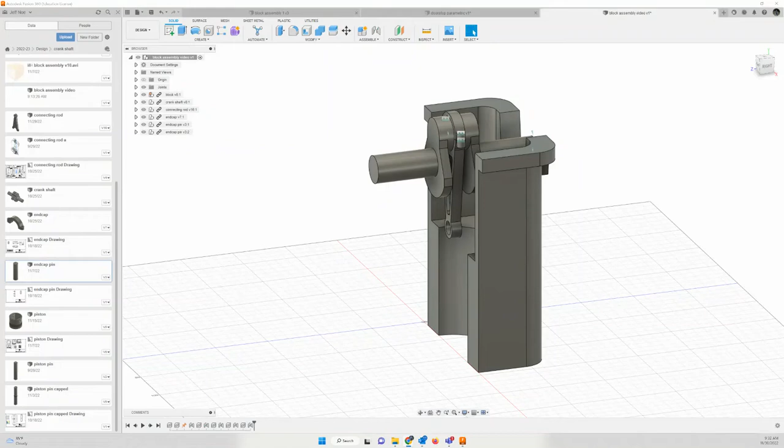All right, so far we've got the block in place. We've put the crankshaft in place. One thing to note on the crankshaft, notice how it's flush with my overhang. Once again, our measurements are very precise, so our assembly has to be precise.

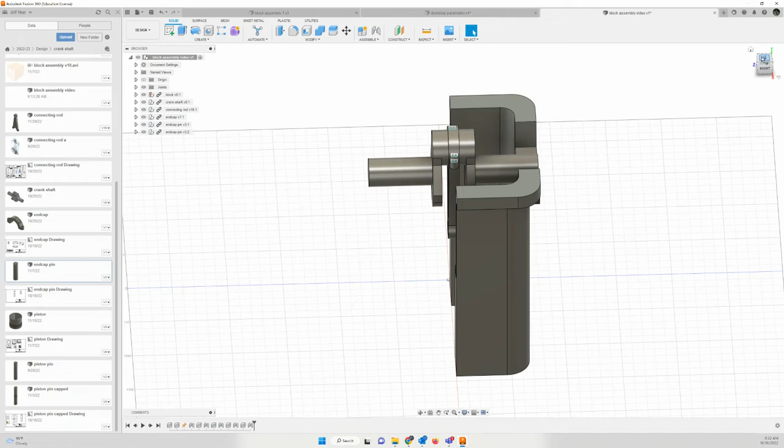The connecting rod's in place. It fits perfectly within the groove here on the crankshaft. If you look at it from the top, it's centered there on the axis. See how the axis runs right up through the middle?

Let's look at the motion. Let's expand the joints and animate the model. All right, so that's what we expect at this point. We've got one revolute, there's nothing there. We're not animating that particular joint where the connecting rod and the crankshaft are coming together, so it's moving around with the crankshaft at this point, the connecting rod is. We'll fix that as we go forward.

We're going to add the piston pin next, and that's going to have a revolute joint. We're going to center the piston pin with the center of this opening, that cylinder there, open cylinder. Then we'll bring in the piston, and it will have a fixed, rigid joint with the piston pin. We'll see what the motion is there, because we're going to come back and add another motion that will create a constraint and force the movement we're looking for.

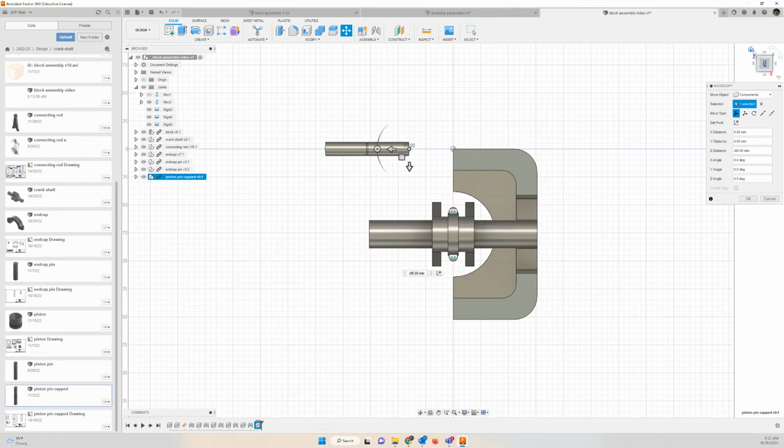Check your caps. Notice how my rounded edges are going to be flush with the rounded edges of the block, those arced edges. That looks good. I'm going to click OK. Zoom in.

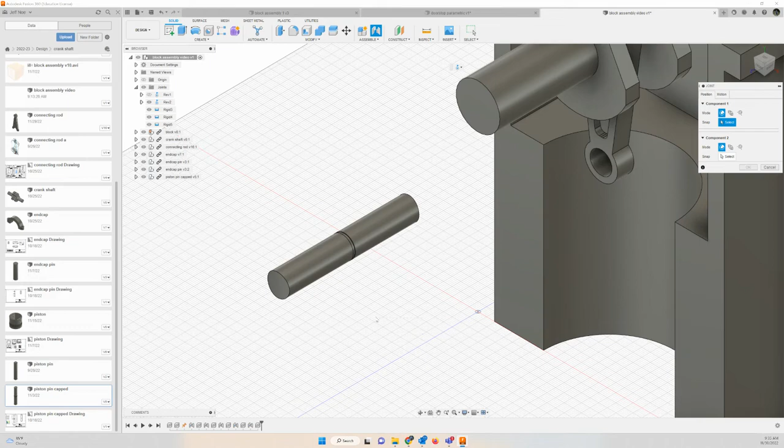Let's create our joint. It's going to be a revolute so that this can spin around the pin, the open cylinder here. And position that snap point. So I've got that cutout as a visual thing, but it actually makes this process harder. I'll zoom in real tight. I don't want the edges, I want that whole band, that body there.

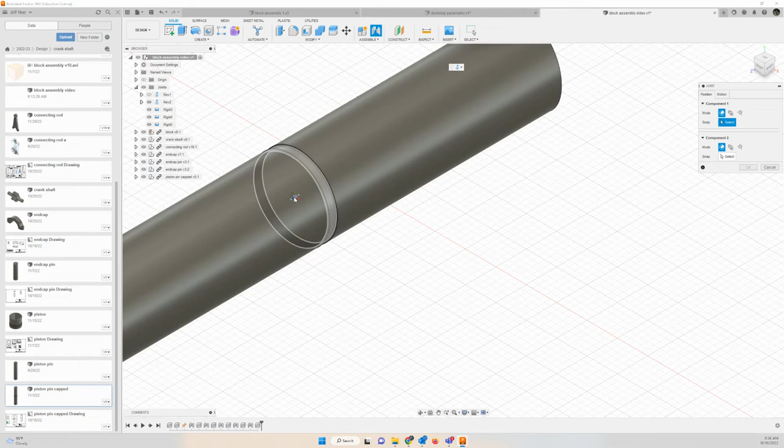Now notice, I've got 3 control points inside of that band that are centered. I want the middle one. So if I hold the control key and move, there's the end, the middle, the other end. I want the middle one. Okay, click. That is the center of my design on that pin, because that center has to match up perfectly to the center of this cylinder.

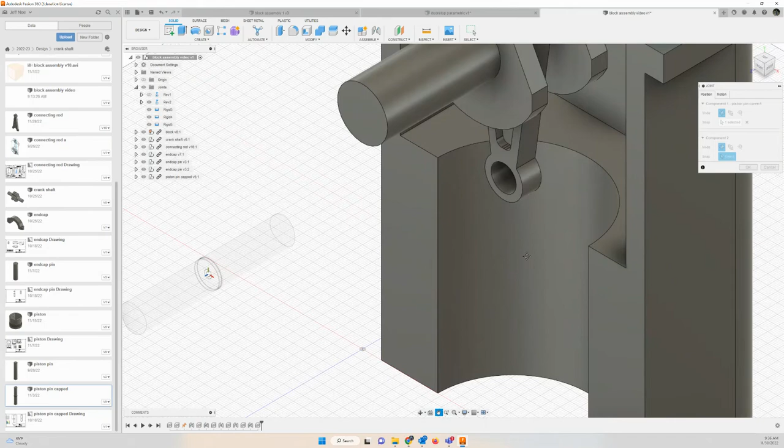Let's move it over. Grab it, there we are. There's the cylinder. Notice I also have 3 points there. So let's hold the control key. There's the middle one, the other end. I want the middle one. I'm holding the control, click.

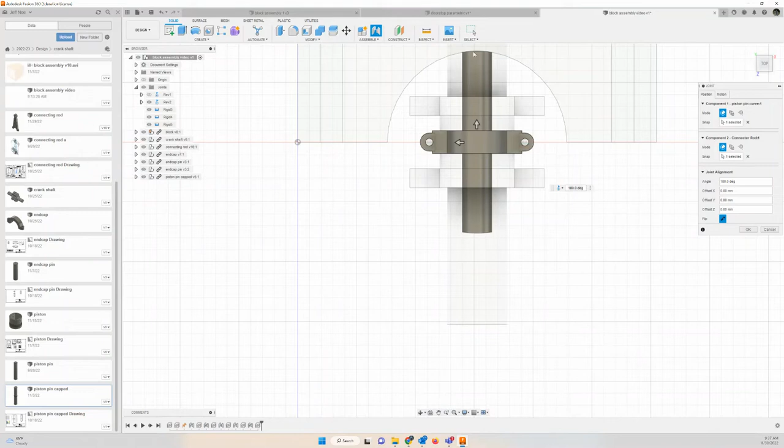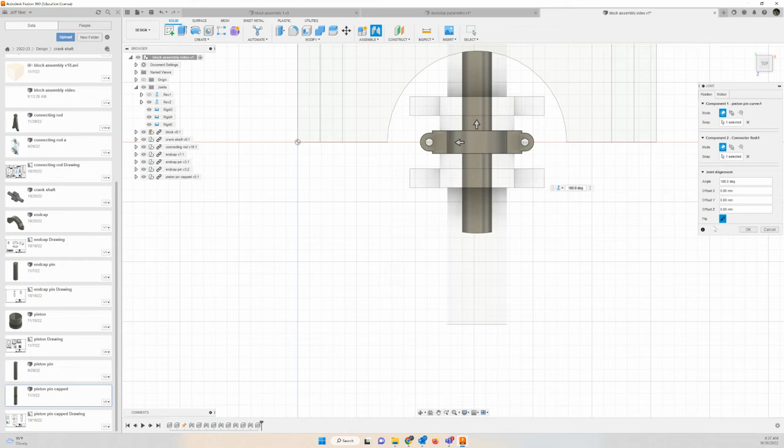All right, now let's go to the top view. Notice how the end of my piston pin is curved and matching the block curve exactly. If yours is not, you may need to rotate it around so that it is, or find the positioning if your measurements are off. I'm going to click OK. Home position.

There I am. Now, we're going to bring the piston in. Our motion hasn't changed - if I animate the model, the whole thing's turning.

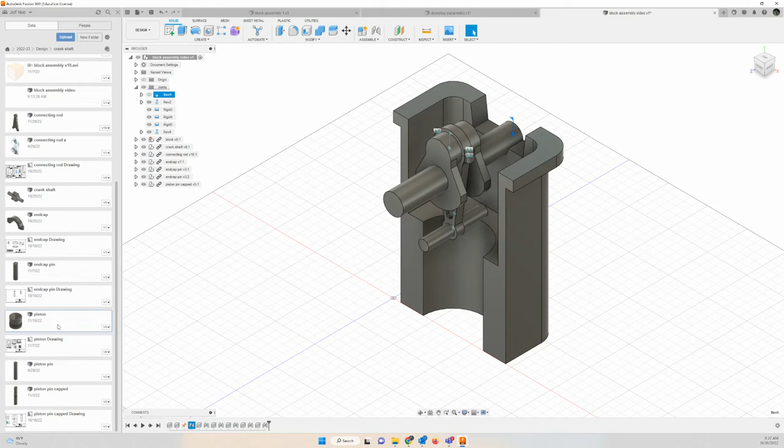Let's bring in the piston. Insert into current design, there's the piston. All right, so my holes are here, and the ends of the pin, those need to line up. Just to make it easier from a visual standpoint, I'm going to rotate it around 90 degrees, and I'm going to pull it out. All right, let's click OK.

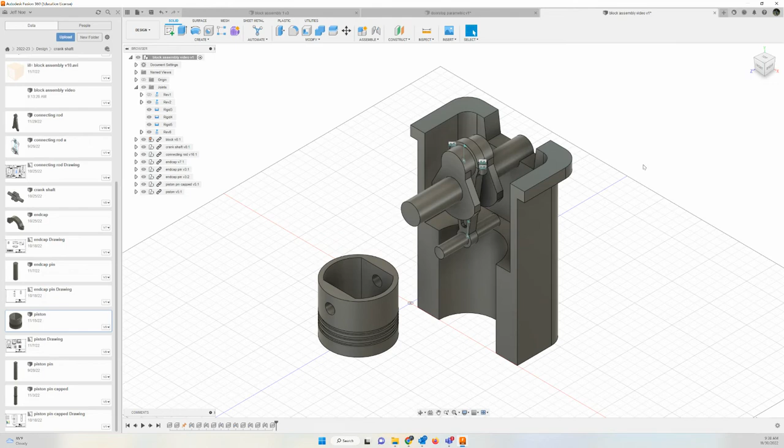We're going to create a rigid joint because this pin doesn't need to rotate within that piston. Joint, let's change our motion to rigid. The piston will be component 1. I want this outside edge.

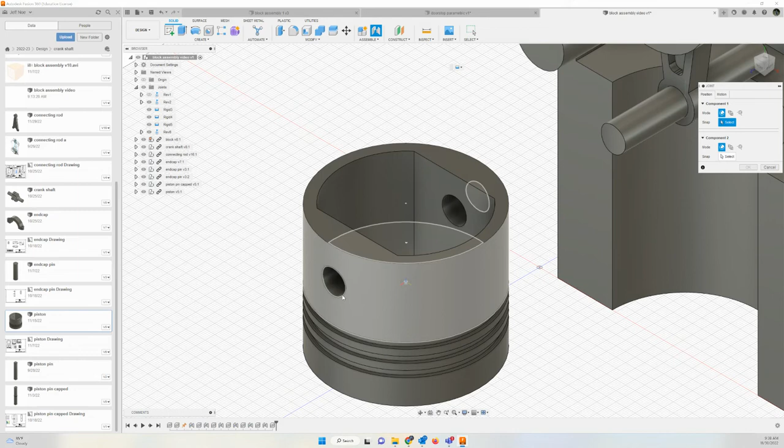All right, so there's the cylinder. Because this is a round face, not a square or flat face, I'm going to have to choose the cylinder, control - I want the outer edge, click, there's that. I'm going to have the same problem with the piston pin. So control key, there's the outer edge, click OK.

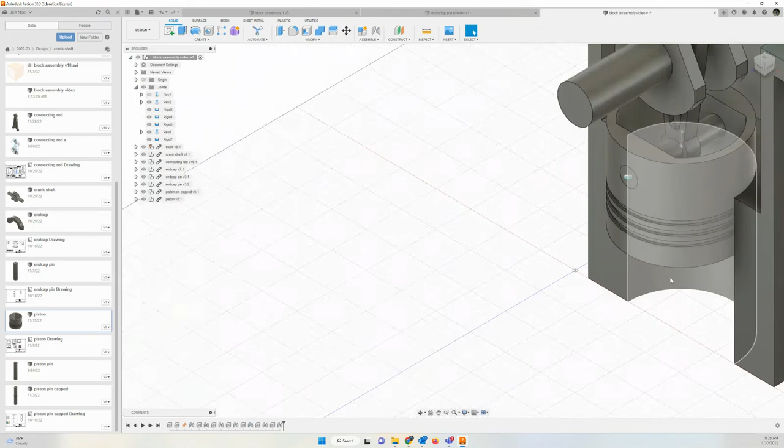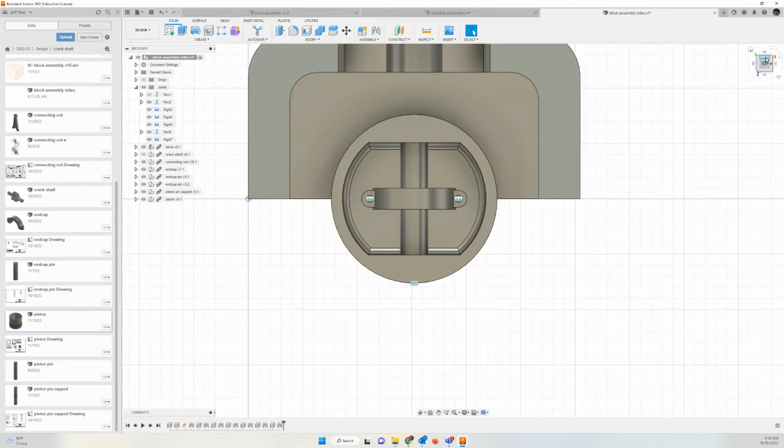Home position. All right, so everything's in place. If we look at it from the top view, let's hide that crankshaft. Look there, that piston is fitting very nicely into the block. All right, let's go look at it from the front. Notice I don't have any overhang on my edges - it's flush, fits perfectly in there. All right, back to home.

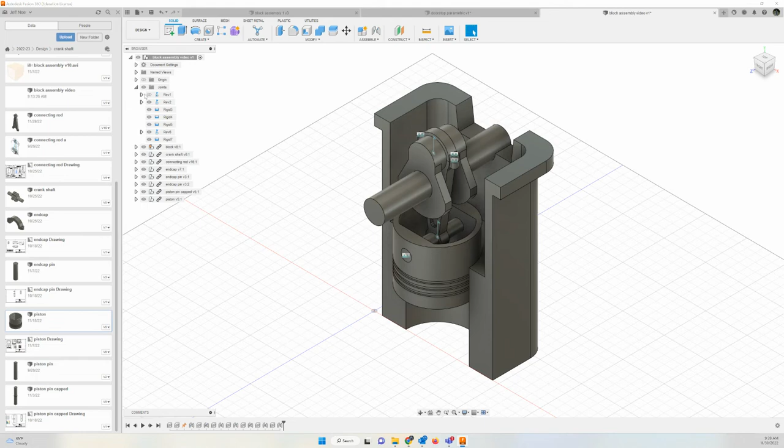Bring our crankshaft back. Let's animate and see what we've got. That's not the motion we're looking for, is it? Not at all.

All right, we need another joint. We need a joint between the piston and the engine block. It's going to be a slide joint because we want this piston to slide up and down within the block. That is going to act like a constraint that allows the connecting rod to rotate around this part of the crankshaft and for the piston pin to rotate within the other end of the connecting rod.

To do this, let's make it easy. Let's hide the crankshaft. I'm going to hide the piston pin. I'm going to hide everything other than the block and the piston, basically.

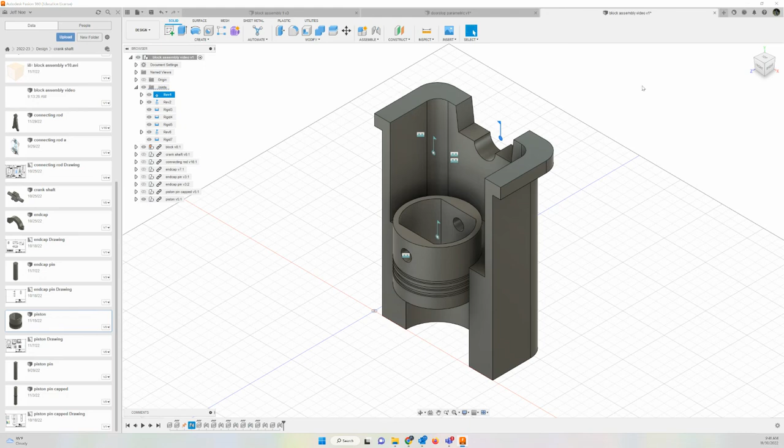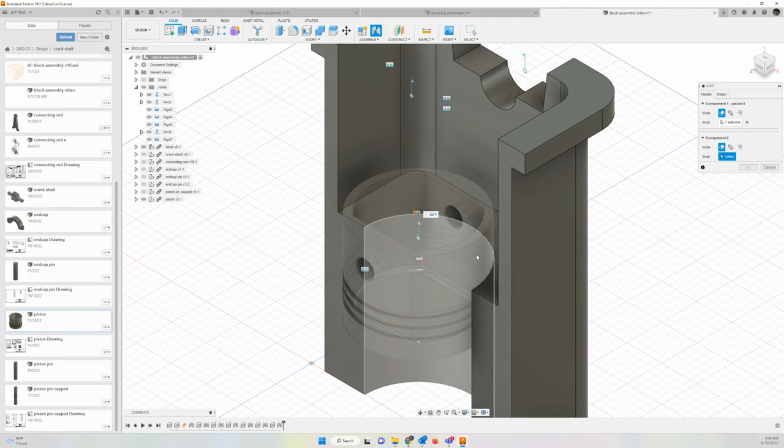All right, let's create a joint. I'm going to create a joint with the middle of the top of this cylinder to the middle of the top of this arc. So there we go, I'm selecting that edge right there. Okay. Control key, there's the center point. I want this arc - control, there's the other center point.

And that looks good. Let's go to the front, check it. Yep, we're still flush on the edges, flush across the top. Our motion, that's not right - slide. Okay, from rigid to slide, we'll click OK.

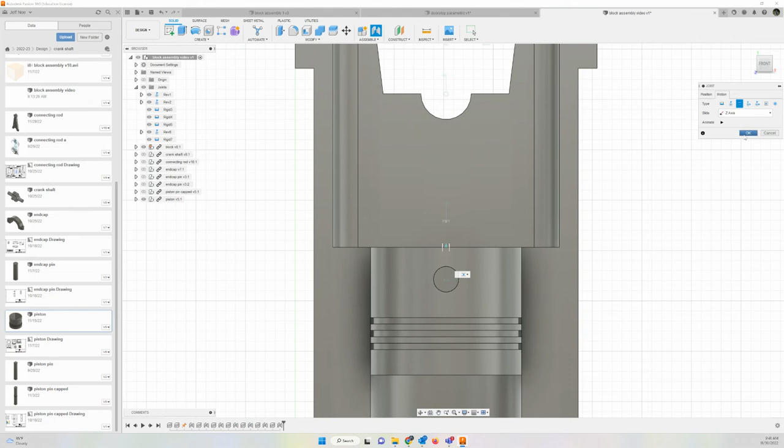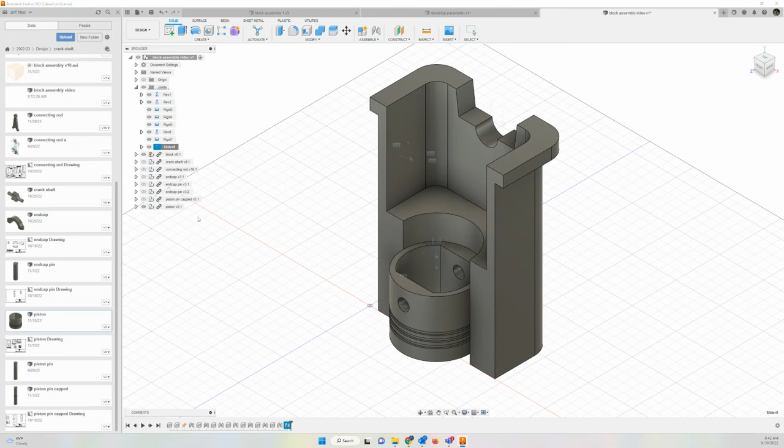Now, home position, let's animate that joint. Now that joint is now moving. The slide is correct, but it's moving too far, isn't it? Do we have to add joint limits? No, we don't, actually.

The other joints that we have in place with the other components will actually constrain the motion of this joint. Let's bring back our other components.

All right, let's go back up to our first revolute and let's animate the model. Okay, so you see that the slide is only going down as far as it can go with the connecting rod. The connecting rod is rotating at the bottom around the piston pin. There's a rotation at the top of the connecting rod around the crankshaft as the crankshaft turns. All these joints are working together to limit the motion of the piston, but it's also drawing the piston up and down.

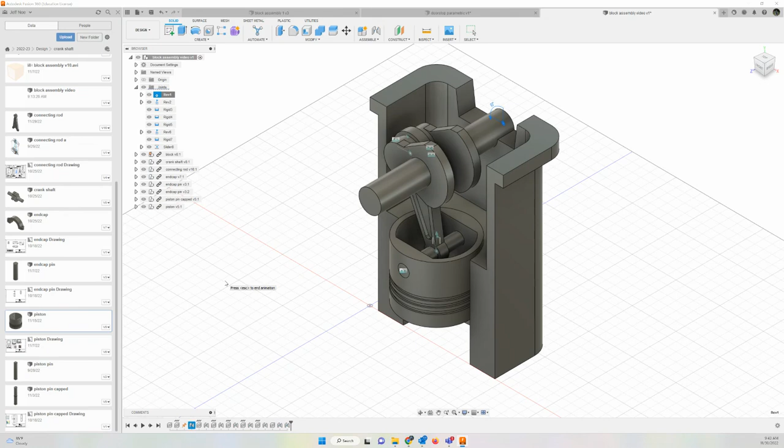All right, when you've got this, you're done.